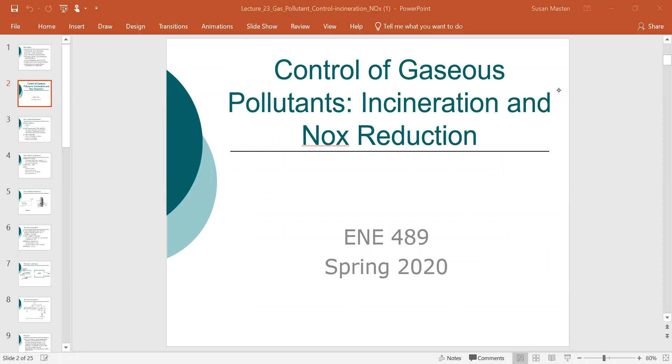Oxidation systems are often used to destroy organic chemicals classified as volatile organic chemicals and/or air toxics. Oxidation typically is rapid and requires only oxygen and heat. Earlier in the semester, we looked at oxidation of organics, focusing on the conversion of these organics to CO2 and water. We talked about that as perfect combustion.

However, combustion is not perfect, and there are numerous byproducts of incomplete combustion, and these include dioxin, which looks like this. Basically, it's a 6-ring structure with 2 oxygens and 2 unsaturated bonds. Dioxin is considered one of the most toxic chemicals, and it has been one of the major concerns of exhaust from incineration.

Another problem that we need to consider if we're using any sort of incineration or oxidation process is, for instance, the conversion of both sulfur and hydrogen sulfide to SO2. And we've talked a lot about SO2, we've looked at SO2 emission.

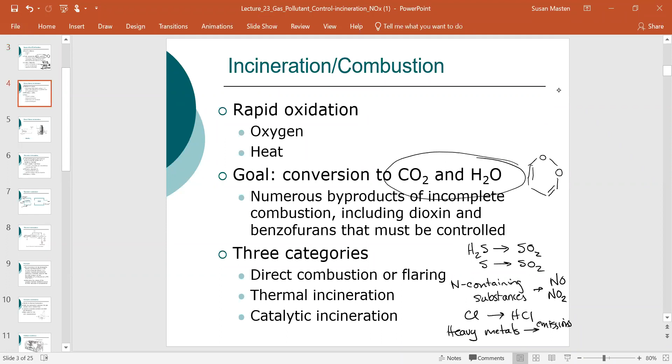Now, direct flame incineration is often the method of choice where the gas stream has a sufficient heat content so that you can avoid the need for supplemental fuels. If you need supplemental fuels, then that gets much more expensive. And then you also have potential emissions from those supplemental fuels.

Just to give you a comparison, I've got this in terms of BTUs per cubic feet. Natural gas is about 1,030 BTUs per cubic feet. Methane is 1,000 BTUs per cubic feet, and landfill gas is about 500. The reason landfill gas is about 500, roughly half of methane, is because landfill gas typically contains 50% methane and 50% CO2.

Efficiency of these direct flame incineration systems can be greater than 98%. It's good efficiency. Whether that is sufficient really depends on your regulations.

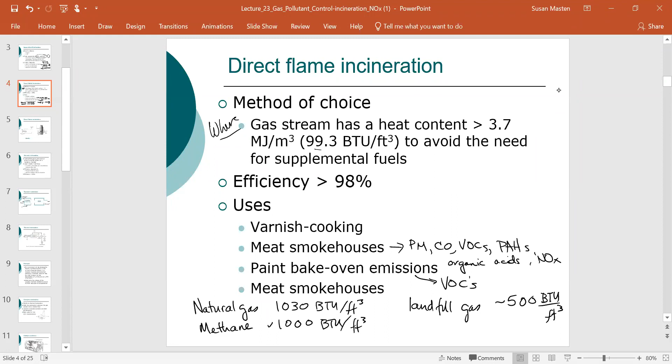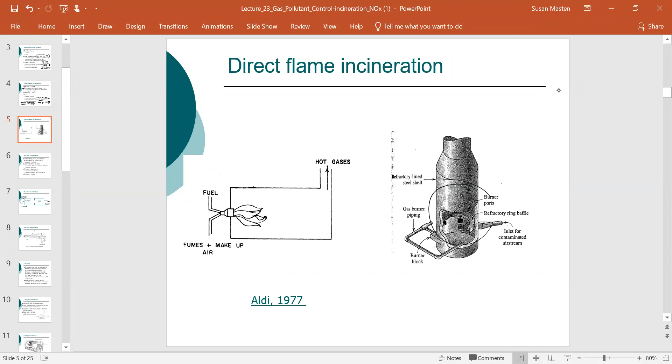Your paint, bake oven emissions, these are predominantly the volatile organics. This is just an image of the schematic of a direct flame incinerator. These are very simple, typically including only a combustion chamber, which you see. You've got fuel, you've got your gas stream that you're treating, and any additional makeup air is treated, and you're combusting that in some sort of a chamber, and those hot gases can then be released.

In order for these to operate properly, we need a constant concentration of the combustible gas, some sort of a combustible gas, and a constant flow rate of these gases. The efficiency is going to depend on the proper mixing of the vapor and our combustible gas and specific residence time. Typically, when we're looking at these processes, we talk about the 3 T's: temperature, time, and turbulence.

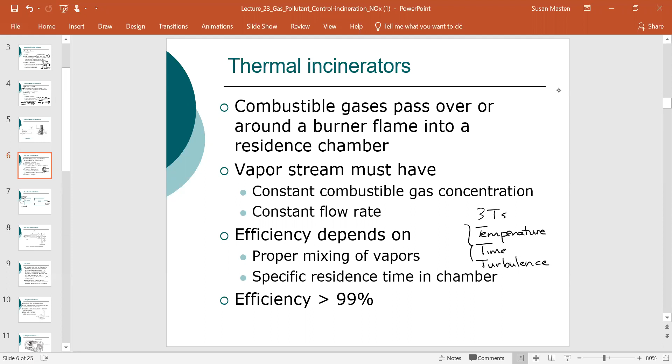If we can recover a portion of that sensible heat from the combustion process and recycle it, we can reduce the amount of fuel required. The main disadvantage is that we need to minimize particulate matter, since it can foul the surfaces of the heat exchanger tubes. That reduces thermal efficiency of heat transfer, which is exactly what we're trying to achieve with what's referred to as a recuperative heat exchanger.

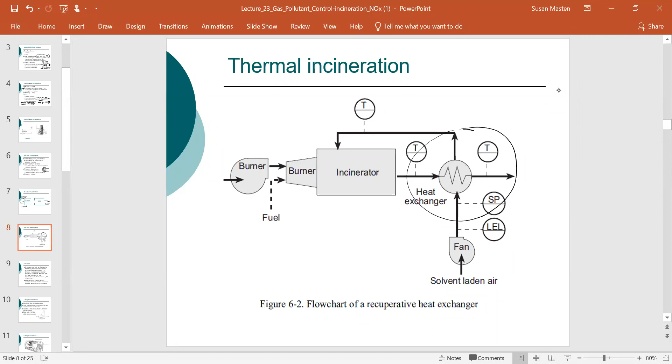Now I'm going to do a simple example looking at determining the volume of a reaction chamber. This is a very simple approach. In reality, we'd need to include the flow rate of the fuel being combusted and any additional air needed. We'd do a mass balance around the energy to determine our flow rates, and then use those flow rates to determine the detention time in our combustion system. But for simplicity, we're just going to look at this as a very simple system.

We have an incinerator. We're looking at destroying cyclohexane. We have a waste stream that is 400 cubic meters per minute.

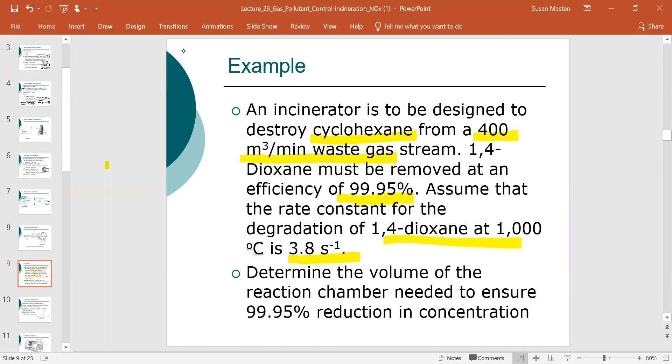I apologize, I'll fix this in the notes later—this should not be cyclohexane, it should be 1,4-dioxane. We need to remove this 1,4-dioxane at an efficiency of 99.95%, and we have a rate constant of 3.8 inverse seconds, so this is a first order reaction. What we want to do is determine the volume of the reaction chamber.

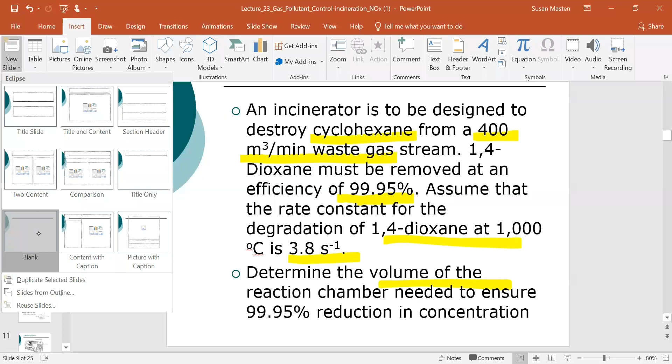Let's insert a new slide. So what do we know? We have a flow of 400 cubic meters per minute. We need 99.95% removal. We have a temperature of 1,000 degrees C. We have a rate constant of 3.8 inverse seconds.

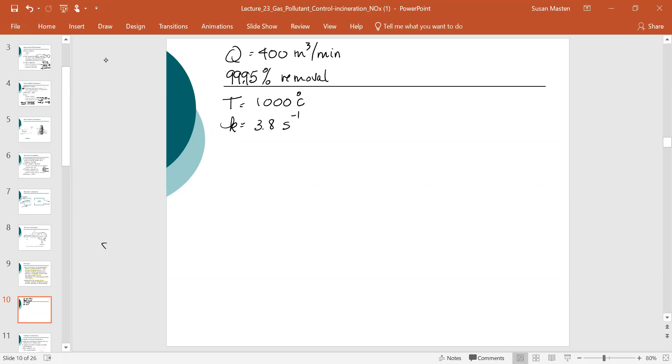1,000 degrees C is used in some incinerators—these are high temperature incinerators. There are actually none known in the state of Michigan. That's actually been one of the major challenges with the PFAS chemicals, which you may or may not have heard of.

These PFAS chemicals are contaminating a significant number of water supplies, and in many cases activated carbon is used to remove them. The problem is, once it's on the activated carbon, what do we do with it? We can't treat that activated carbon by normal regeneration processes, that would just emit the PFAS chemicals into the atmosphere. So what's typically done is to incinerate that spent activated carbon.

The problem is, to incinerate it, we need a high temperature incinerator—so we're talking about 1,000 degrees C. So yes, these do exist.

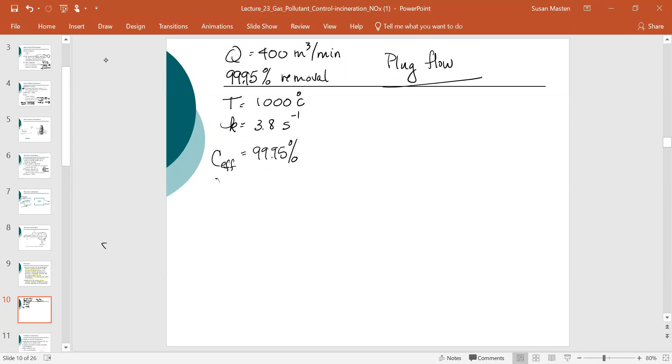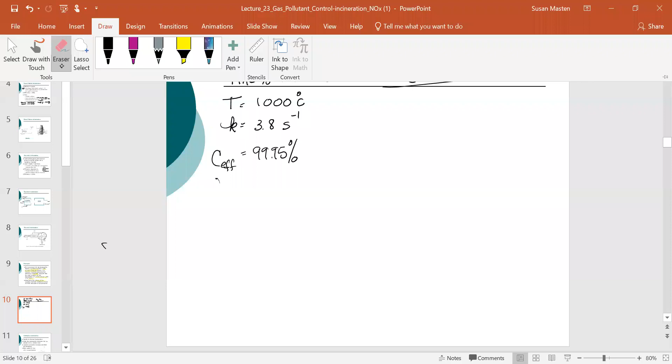Typically, we will model these combustion processes as a plug flow system. Our efficiency, we said, was 99.95%.

That means we're going to write this as our effluent: take 1 minus our efficiency, giving us 0.05% of the initial concentration remaining in our effluent gas stream. So C over C naught is equal to 0.0005.

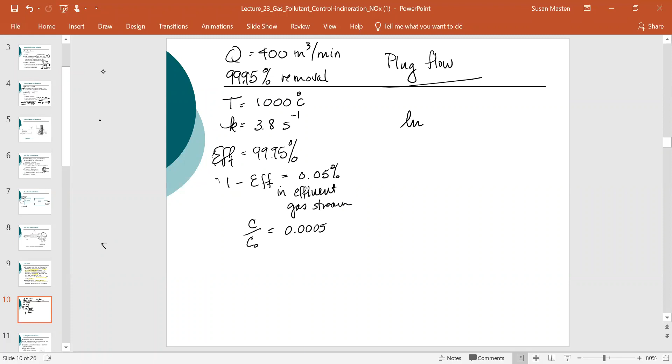And if we have a plug flow system, we can model this as the natural log of C over C naught equals minus KT. So ln(C/C naught) equals ln(0.0005), or equivalently using the 99.95% removal. That is equal to minus 3.8 inverse seconds times T. Solving this, T is equal to 2.0 seconds, so we would need a detention time of about 2.0 seconds.

You're given the flow rate, and the volume is equal to Q times T, which we've looked at before.

So if we multiply that flow rate that was given by 2.0 seconds, we would need a reactor that would be about 13.3 cubic meters.

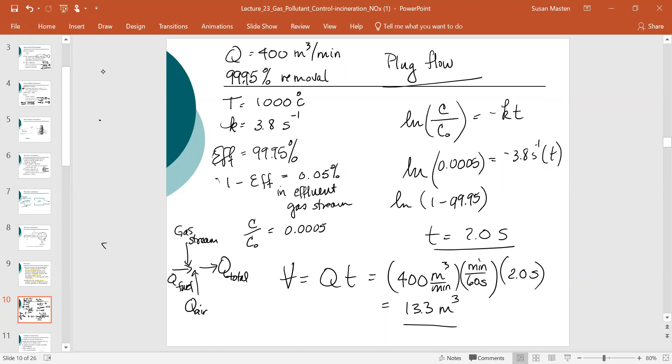Now remember, this is a very simple approach. As I've mentioned, in reality we've only looked at our contaminant gas stream. We would also have to determine the flow of our fuel, and if we need air. We would need to include the total flow rate, and we would determine that by doing an energy balance on the system. But we won't do that today. So we're really just looking at a number of these processes.

Catalytic incineration is very similar to thermal incineration. The major difference is that a catalyst is used to lower the temperature of the incineration process, which reduces fuel consumption. And we may be able to increase the rate of reaction, which decreases the size of these units.

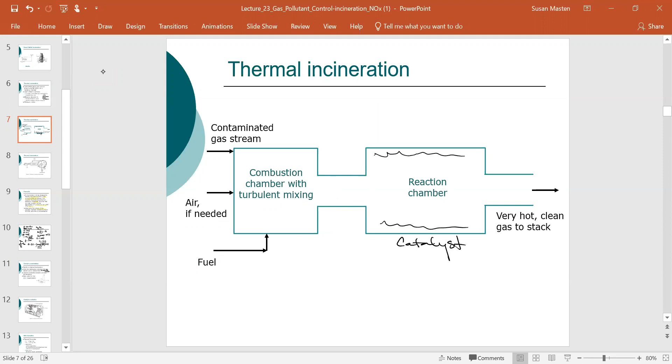So basically, it's an incinerator, a large boiler system, no different than before. The big difference is that we put in some sort of a catalyst inside this reactor to improve the rate of oxidation and, again, to lower the temperature.

These are best suited for when there are low VOC concentrations and low particulate matter. The reason for the low particulate matter is that if particles settle on this catalyst, they deposit on the surface, and that's referred to as fouling. That fouling decreases the efficiency of the catalyst, and unfortunately these catalysts are often very expensive.

In most cases, most metal oxide catalysts are poisoned by chlorinated VOCs. So thinking back, we mentioned that groundwater that's contaminated with tetrachloroethylene or trichloroethylene - you remove that, let's say by an adsorption process, and then you're looking at regenerating that adsorbent, so you have this PERC in your off gas. You just want to treat that off gas so you're not discharging PERC. In that case, I can use incineration, but if I look at catalytic incineration, I have to make sure I have a catalyst that isn't going to be poisoned by that chlorinated compound.

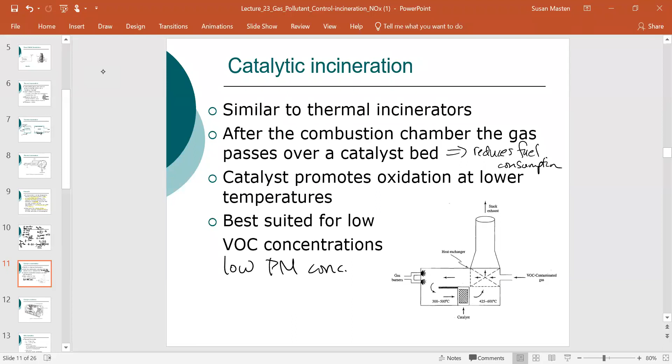Many of your platinum-based catalysts are poisoned by the presence of chlorine and fluorine. So the choice of these catalysts can be a bit challenging. You're really working typically with a supplier to make sure that that catalyst is the optimal one for the situation at hand.

This just shows you a cutaway of a catalytic oxidizer, and you can see you've got these catalysts lining the inside of this reaction chamber. As I mentioned, the major advantage here is that you're reducing the temperature. You can potentially reduce the size of the unit, but you really have to consider the effect of the contaminant stream on both physical and chemical deterioration of the catalyst.

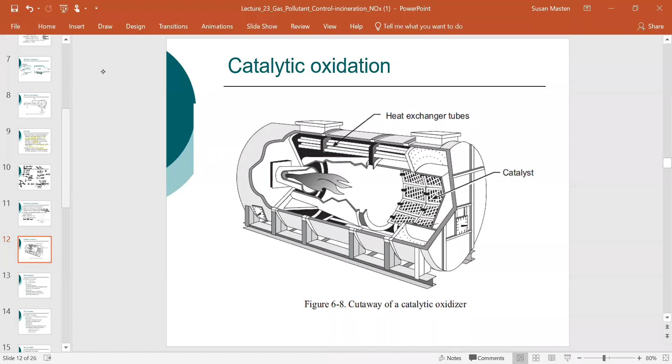Now, in the US, more than 10 million tons of NOx is emitted to the environment each year as a result of burning fossil fuels. We've talked about ozone formation in the troposphere, photochemical smog, and we've learned that controlling NOx is critical to controlling ozone formation and photochemical smog, therefore important in protecting the public health. The controls on NOx have been primarily on combustion system modification.

So we need to look a little bit at how NOx is formed in the atmosphere. There are really three mechanisms. The first mechanism is thermal formation. Air contains nitrogen and oxygen, and at high temperature, these can react to form NO and NO2.

Now this reaction here is shown as reversible. It is a reversible reaction, but the reverse reaction is extremely slow. So basically, once you form NO, it's unlikely that NO will reform into nitrogen and oxygen gases. That NO can also react with oxygen to form NO2, but typically in a boiler or any sort of combustion device that we're talking about, the length of time that those gases are present in the incinerator or boiler is too short for NO2 concentrations to build up.

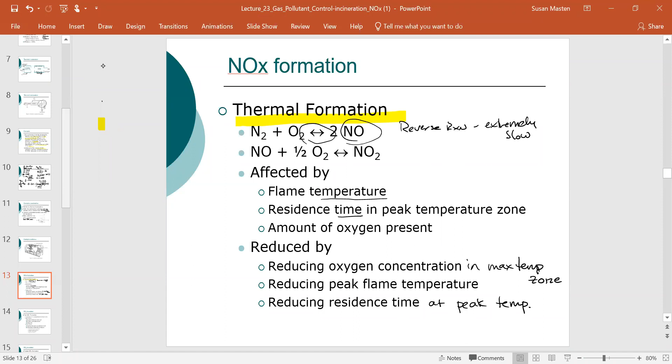Now we also can form NOx from the fuels that we use. Typically, coal and heavy oil contain somewhere between 0.5 to greater than 2% nitrogen. So we have nitrogen in these fossil fuels, and that nitrogen can also react in this incineration process, in this combustion unit, to form NO and NO2, predominantly NO, but also NO2. That's going to depend on the amount of nitrogen present in the fuel, the amount of nitrogen present overall.

Challenges are that the relationship is not linear, and it's quite complex. So it's difficult to predict, knowing how much nitrogen we have in the fuel, how much NOx we will produce. And also the mixing rate of the fuel and the air. So we're back to turbulence. There's 3 T's, remember: time, temperature, and turbulence.

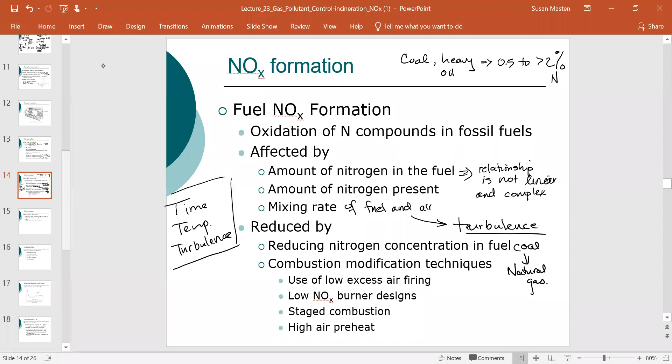And the last of the 3 is referred to as prompt NOx formation. Here what we have is free radicals that are formed in the burner flame, in the flame itself. These can be cyanide, hydrogen cyanide radicals. These can be NH, nitrogen radicals. These react to form NOx.

Challenge with these is that typically your free radical reactions are not affected by temperature. So you're not going to see that effect of temperature we mentioned—temperature doesn't play a significant role here. And the other thing is that combustion modifications really have very little influence on this prompt NOx formation. We're really focusing on the thermal formation and fuel NOx.

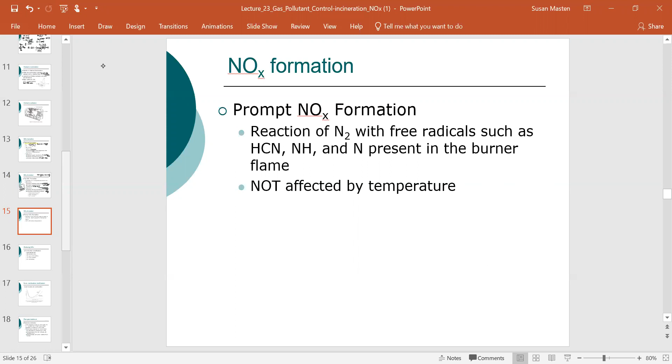The one modification that we'll look at in more detail is low excess air. So if you think back to earlier in the semester, we looked at various stoichiometric reactions where we had, for instance, carbon reacting with oxygen to form CO2. We had hydrogen reacting with oxygen to produce water, so we had a perfect combustion process. We also looked at sulfur reacting with oxygen to form SO2.

And we calculated the concentrations of gas streams. What we used was excess air—we wanted to ensure that we had sufficient amount of oxygen. So when we did these calculations, we used typically around 50% excess air. 50% is on the high end, typically for coal-fired boilers. You're looking about 20 to 50% excess.

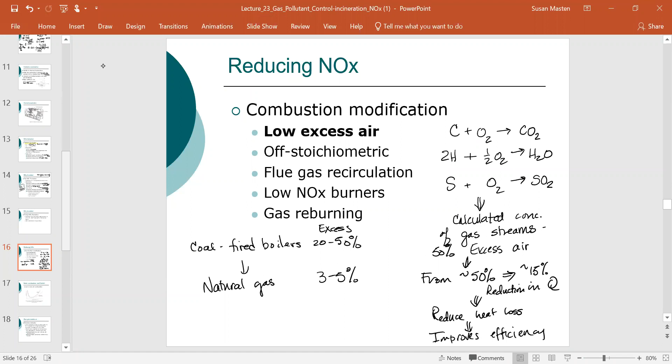As I mentioned, if oxygen is too low you have problems with carbon monoxide formation, hydrocarbon formation, particulate matter release, and particulate matter can actually cause fouling on your boiler tube surfaces, which decreases efficiency. So we can use low excess air combustion, but we have to be very careful in its operation.

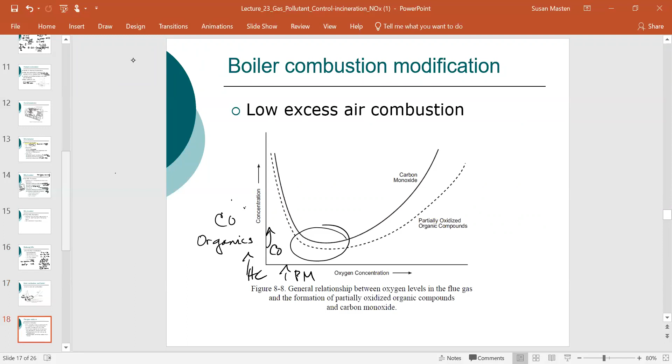The other thing we can do to reduce NOx emissions is recognize that the problem of ozone levels in the troposphere is typically seasonal. So it may not be cost effective to make significant changes in your boiler system, because you may only need to reduce NOx levels during your high ozone seasons.

When MSU was burning coal, they did use this selective reduction treatment. What is done is that you add a small amount of ammonia or urea, and that reacts with the NOx.

This is urea, and we have ammonia that can react with the NOx that's formed, predominantly NO, and that will produce N2 and H2O, and potentially carbon dioxide. So what you're doing is you're reducing the NO to N2 in the boiler itself.

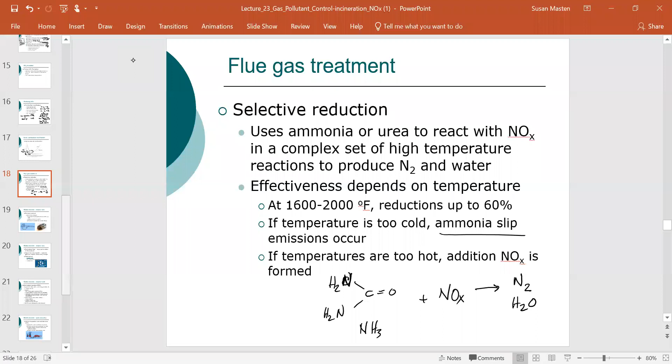The last thing we'll look at are mobile sources. Everything we've talked about to this point are stationary sources. So how can we reduce emissions, specifically of NOx, from mobile sources? The major way that has been done is three-way catalysts.

So basically how these work: they're oxidizing and reducing NOx to nitrogen and oxygen. They oxidize carbon monoxide to CO2, and then the unburned hydrocarbons react with oxygen to produce CO2 and water, assuming perfect combustion there.

So these are active catalytic materials. Platinum is one, palladium is another. Typically they have an oxide-based inorganic promoter. These are free radical reactions that are generated, and they have a support media.

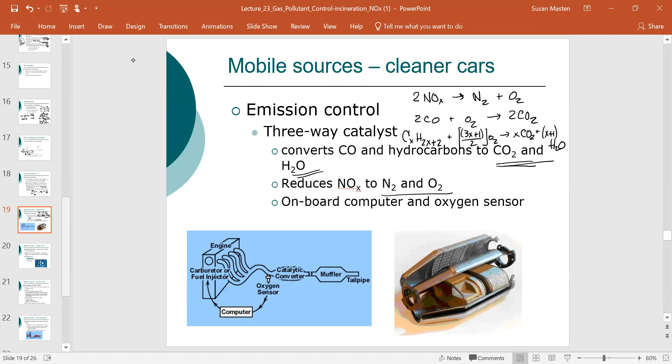In addition, we typically now install particulate filters to trap particulates in exhaust. This is especially important for diesel exhausts. You can control carbon monoxide and hydrocarbon emissions by switching from a gasoline-powered engine to a diesel. However, the real problem with diesel engines is particulate matter.

We now have also been installing vapor recovery systems, and these capture the gasoline vapors before they escape from both the hot engine and from the fuel tanks. It used to be, and sometimes still, a car is stopped at a red light, surges forward when the light turns green, and you smell this typical hydrocarbon smell.

That used to be much more common than it is today. You could often see that black soot coming from the tailpipe, from the particulate matter that was being emitted, and that smell, typically a white fume, unburned hydrocarbons. We're doing a much better job at capturing that material, reburning it, and reducing emissions.

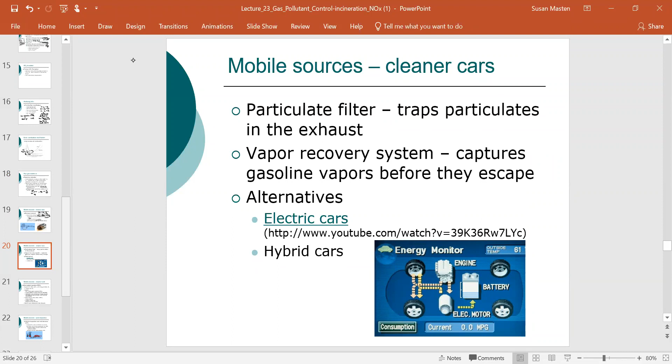The other thing that we have done is to reformulate gasoline, and I should have changed this, it's 25.

Roughly 25 states and the District of Columbia require cities with the worst smog pollution to use some sort of reformulated gasoline. The idea is that this gasoline contains less volatile organics, so fewer are emitted, even during pumping of gasoline.

Oxygen additives are used to make the gasoline burn more efficiently, and detergents are often added to prevent buildup of engine deposits, keeping engines running smoothly and more efficiently.

Starting in the 1990s, methyl tertiary butyl ether, MTBE, was added as an oxygen additive to gasoline. This increased octane numbers and was used as an anti-knocking agent, in part to replace lead, which was also added as an anti-knocking agent.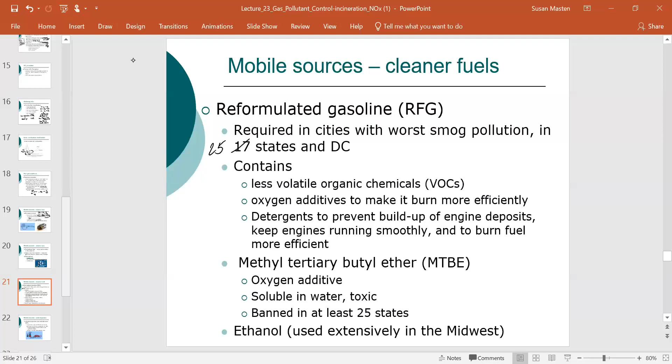But the petroleum and auto industries chose not to add ethanol at that point and searched for others instead, because they didn't want ethanol—particularly produced by farmers—to be used. They couldn't patent ethanol production and thought it would significantly impact the petroleum and gasoline industry. So they kept searching until they found tetraethyl lead, and we all know that story.

The last thing that is often done isn't really a control mechanism, but essentially a check on these control systems. In a number of states, as part of the state implementation plans we talked about earlier, states have mandated vehicle inspection and maintenance programs.

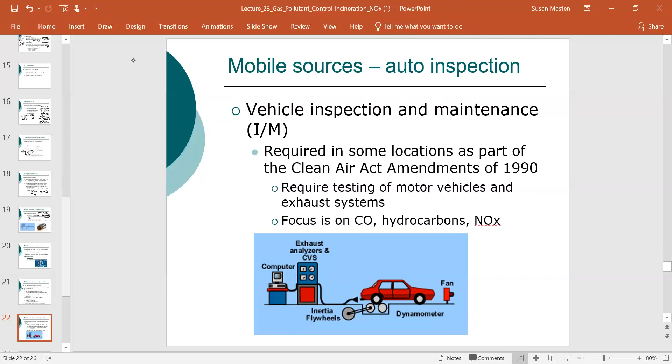For example, when I lived in New Jersey, on a yearly basis you had to bring your car to a state inspection station. They monitor the car for a number of reasons, from structural integrity down to emission controls. Depending on whether you met the requirements, you either passed and got a green sticker, or you didn't and had to fix it and come back through inspection again. These are often used, especially in designated urban areas, to try to meet SIPs. They're not really a control strategy in that they don't change how the car operates, but they ensure the car is operating properly.

So I'll end there. We've gone through a number of air pollution control devices. Hopefully I've brought things back together in terms of the rest of the semester, helping you understand how we develop strategies and design systems to ensure compliance with all these federal and state regulations.